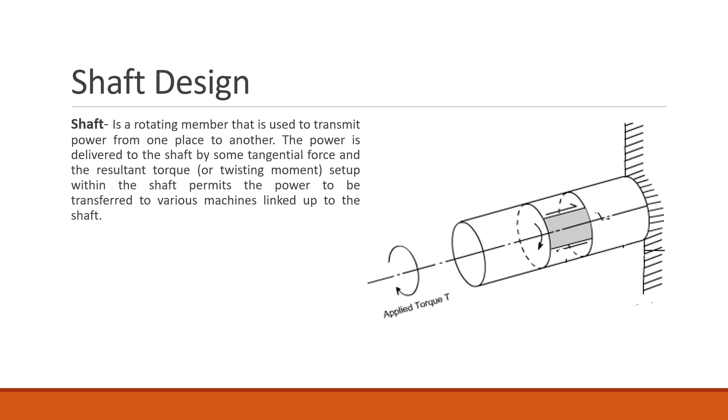Types or general classes of shafts. First is the transmission shaft, which transmits power between the source and the absorbing power. Next is the machine shaft, a shaft which is an integral part of the machine itself. Next is the line shaft or main shaft, which is the one driven by a prime mover.

Next is the drive shaft, a shaft which transmits power from a motor or engine to the rest of a machine. Next is the counter shaft, jack shaft, or head shaft. These are shafts intermediate between a line shaft and a driven machine.

Spindles are short shafts on machines that impart motion either to a cutting tool or to a workpiece. Axle is a non-rotating bar which does not transmit any torque but is only used to support rotating machine elements like gears, pulleys, and wheels rotating on it. Last is the stub shaft, an integral part of the prime mover.

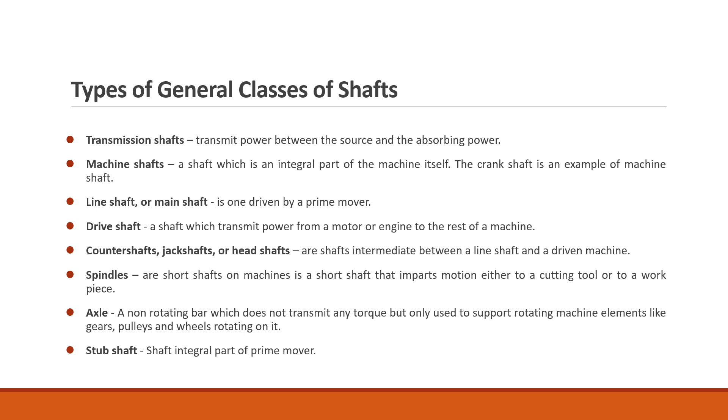Shaft formulas. First is the torque of the shaft. Torque is equal to force times the radius, or force times diameter over 2.

Next is the pure torsional stress for the shaft. Torsional stress is equal to T over Zp, and it is equal to T multiplied by C over J, where T is the torque, C is the center, and J is the polar moment of inertia.

For solid shafts, torsional stress is equal to 16T over pi d cubed, and for the hollow shaft, torsional stress is equal to 16T dO over pi multiplied by the outside diameter raised to 4 minus inside diameter raised to 4. If the polar moment of inertia is not given, the formulas are...

Pi multiplied by the diameter raised to 4 over 32, for the circle. And for the square, width times height raised to 3 over 6.

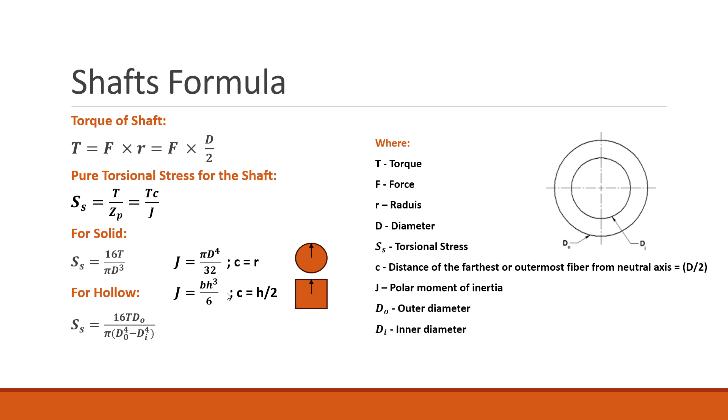Pure flexural stress. It is the bending stress, tensile or compressive, due to the forces acting upon machine elements like gears, pulleys, etc.

Flexural stress is equal to M over ZR. M is the bending or flexural moment, and ZR is the rectangular section modulus.

And it is also equal to 32M over pi d cubed. For hollow shaft, it is equal to 32 M dO over pi multiplied by the outside diameter raised to 4 minus inside diameter raised to 4.

If the rectangular section modulus is not given, the formulas are pi d raised to 4 over 64 for circle, and width times height raised to 3 over 12 for square.

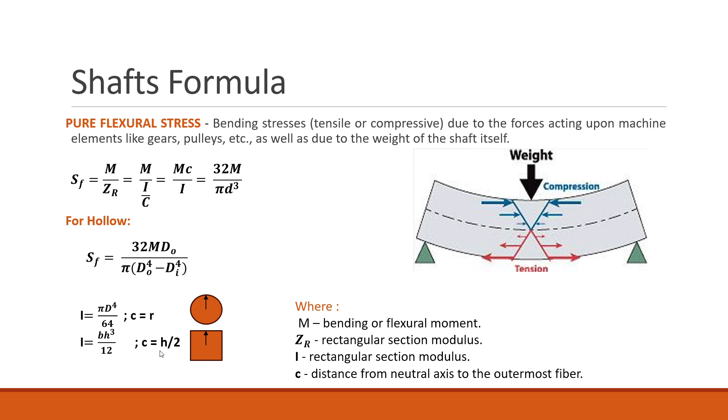Combined torsion and bending stress. For maximum shearing stress, it is equal to 16T over pi d cubed, multiplied by the square root of the combined shock and endurance factor for bending times M raised to 2, plus the combined shock and endurance factor for torsion times torque raised to 2.

And for the maximum axial stress, it is equal to 16T over pi d cubed, times the quantity of the combined shock and endurance factor for bending multiplied by M, plus the square root of the combined shock and endurance factor for bending multiplied by M raised to 2, plus the combined shock and endurance factor for torsion times torque raised to 2.

And for the combined normal stress, it is equal to axial stress, positive or negative, plus flexural stress.

And for the combined normal and shear or torsional stress, the maximum shearing stress is equal to one half times the square root of normal stress, positive or negative, plus 4 multiplied by shearing stress squared.

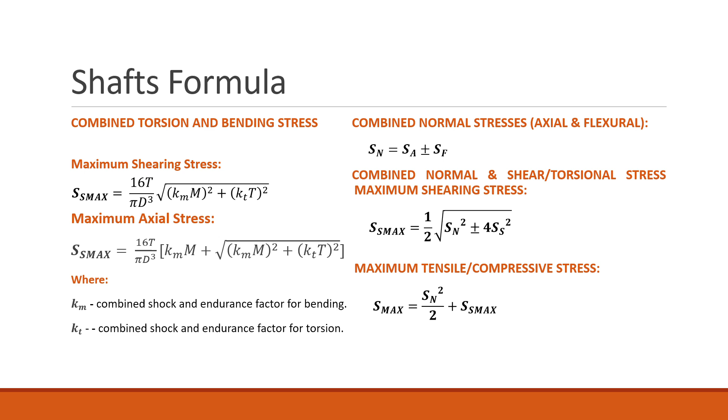Power transmitted of shafts. P is equal to 2 pi T N, in terms of kilowatts or HP. For SI units, P is equal to torque multiplied by the speed over 9,549,000. For English units, P is equal to T multiplied by N over 63,025.

Angular deformation or angle of twist. It is equal to TL over JG, where T is the torque, L is the length of the shaft, J is the polar moment of inertia, and G is the modulus of rigidity.

Stress relationship. Yield strength at shearing torsion is equal to 0.5 of yield strength at tension, compression, or bearing stress.

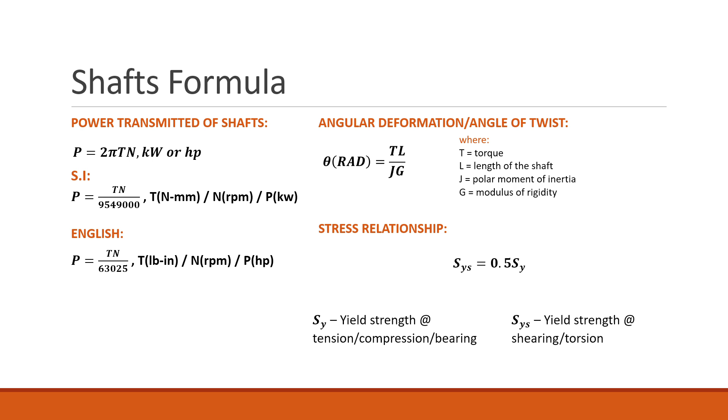Empirical formula for power. For main power transmitting shaft, it is equal to d cubed multiplied by the speed over 80, cubic inch per HP minute.

For the line shaft carrying pulleys, P is equal to d cubed multiplied by the speed over 53.5, cubic inch per HP minute.

For smaller short shafts and counter shaft, P is equal to d cubed multiplied by the speed over 38 cubic inch per HP minute.

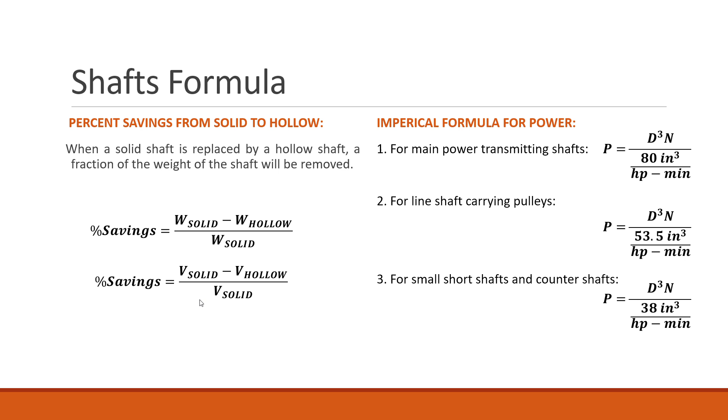Percent savings from solid to hollow. When a solid shaft is replaced by a hollow shaft, a fraction of the weight of the shaft will be removed. Thus, percent savings is equal to weight of the solid minus weight of the hollow over weight of the solid, and volume of the solid minus volume of the hollow over volume of the solid.

Let's proceed to the sample problem. A shaft is used to transmit 200 kilowatts at 300 RPM by means of a 200 mm diameter sprocket. Determine the force tangent of this sprocket.

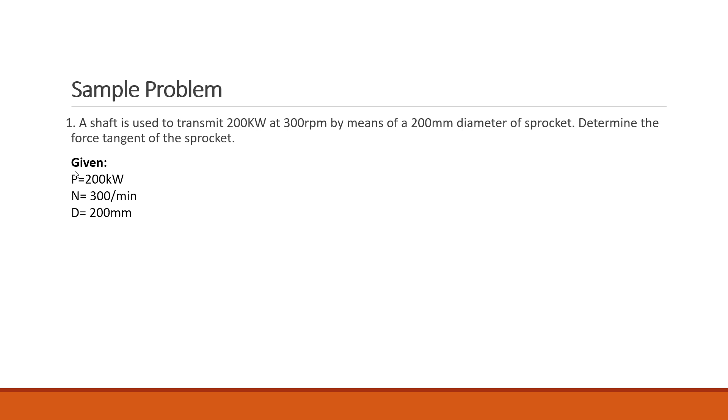The given is first the power, which is 200 kilowatts. Next is the speed, 300 per minute, and the diameter is 200 millimeters.

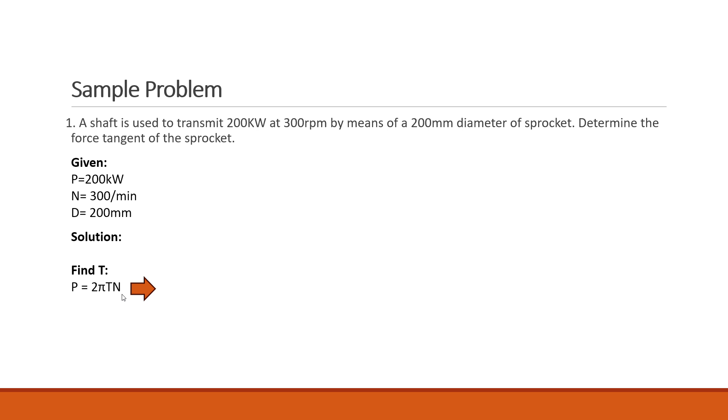For the solution, first let's find the torque. We can find the torque using the power formula, since we have given power and given speed, and pi is of course a constant value. So this is the formula: T is equal to P over 2 pi n.

Substitute the values: 200 kilonewton meter per second over 2 pi times 300 over 60 seconds. We converted it into seconds so the seconds cancel out. And the answer is 6.3662 kilonewton meter.

Next, let's find the force. This is what is asked of us. Torque is equal to force times d over 2. We have the torque and we have the value of the diameter. So the formula becomes force is equal to torque over radius, or d over 2.

So this is the value: 6.3662 kilonewton meter over 200 millimeters times 1 meter over 1,000 millimeters, since we need to convert it so the meters cancel, over 2. Then the answer is 63.662 kilonewton. This is the final answer for number 1.

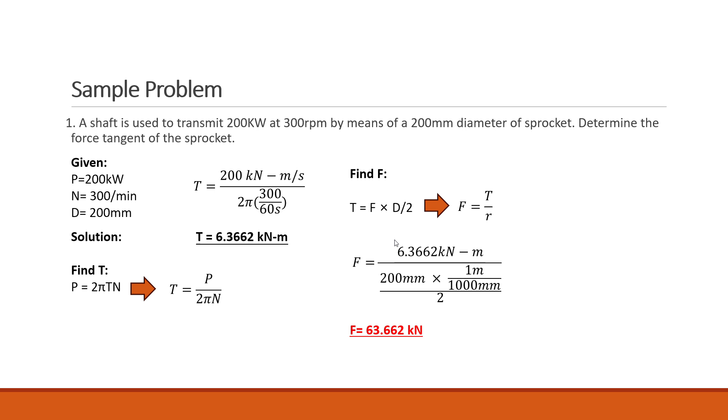Let's proceed to sample problem number 2. Find the diameter of a steel shaft which will be used to operate a 110 kilowatt motor rotating at 5 RPS if the torsional stress is 90 megapascal.

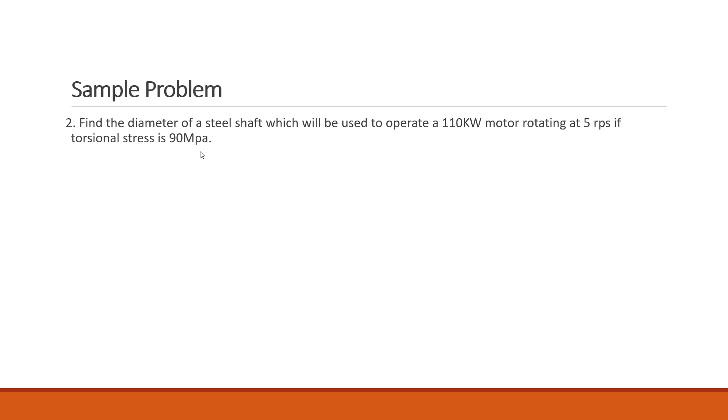The given are, first, the power, which is 110 kilowatts. Next is the speed, which is 5 per second, and the torsional stress, which is equal to 90 megapascal.

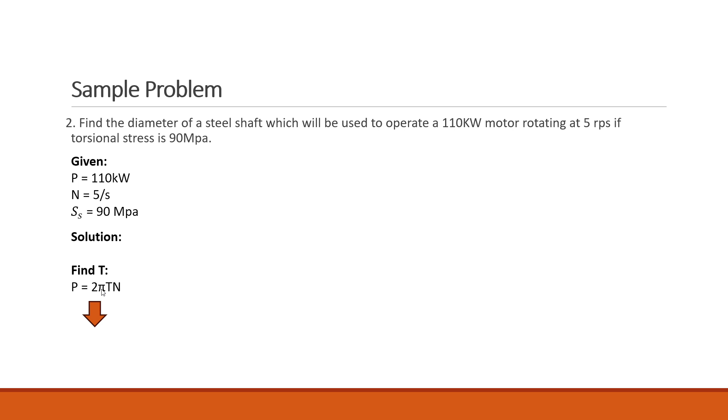First let's find again the torque. Same process as in number 1: find the torque using the power formula. Then substitute the values, and the answer is 3.5014 kilonewton meter. Then next, find the diameter.

To find the diameter, we can use this formula since we have the given torsional stress. We can use 16T over pi d cubed.

It will be equal to, let's substitute the values first: 16 multiplied by 3.5014 kilonewton meter over pi multiplied by 90,000 kilonewton over meter squared. We made it into kilonewton meter squared, so it became 90,000.

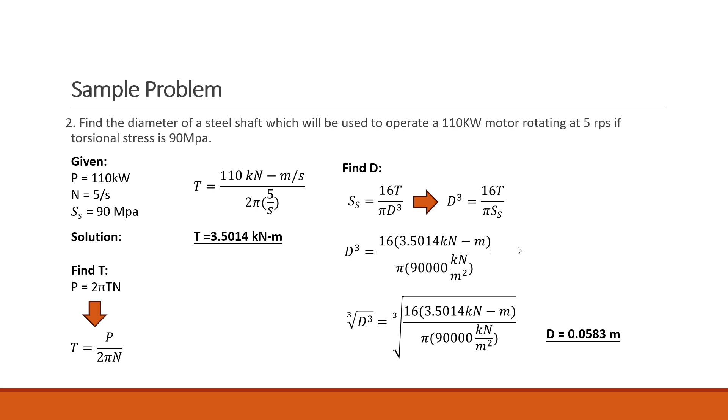Let's proceed to the next. A shaft has an ultimate stress of 350 megapascal and has a factor of safety of 5. The torque developed by this shaft is 3 kilonewton meter and the outside diameter is 80 millimeters. Find the inside diameter of the shaft.

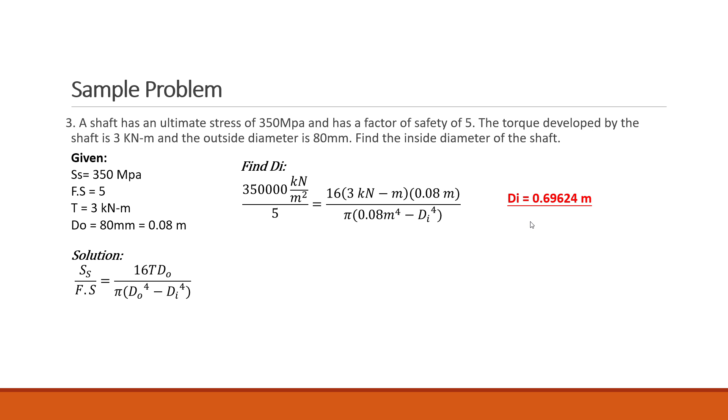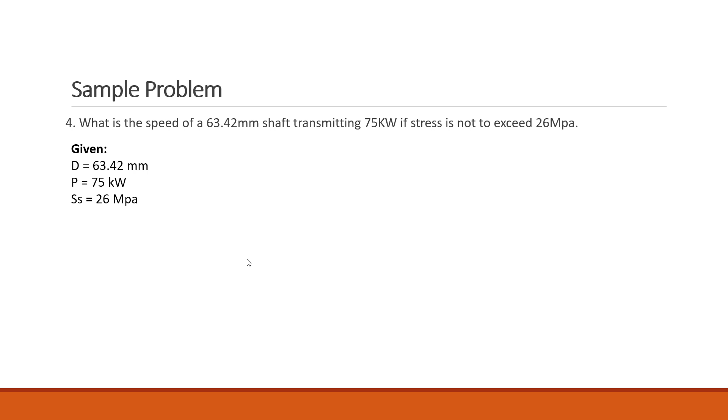Next problem: what is the speed of a 63.42 mm shaft transmitting 75 kilowatts if the stress is not to exceed 26 megapascal? Here is the given solution.

Torsional stress is equal to 16T over pi d cubed. Since what we need to find first here is the torque, so it becomes equal to this. The answer becomes 1.3022 kilonewton meter. That is the torque.

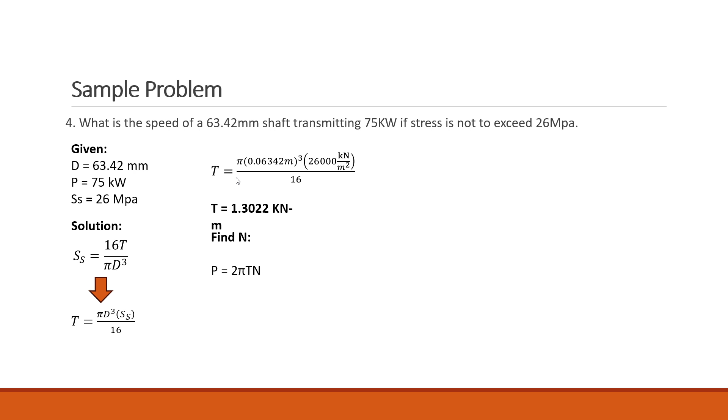Then let's find the speed, which is what's being asked in problem number 4. Using the power formula, N is equal to P over 2 pi T. And this is when we replace the values, and the answer becomes 549.99 RPM.

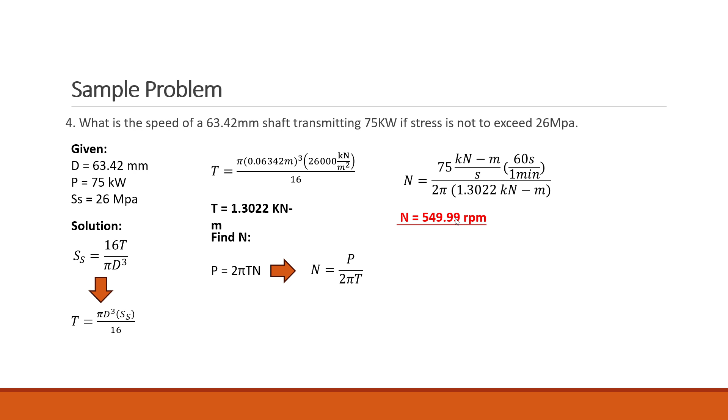Next, this seems to be the last problem. A steel shaft transmits 50 horsepower at 1,400 RPM. If the allowable stress is 500 psi, find the diameter.

Here are the given values: P is equal to 50 horsepower, speed is equal to 1,400 RPM, and the allowable stress is equal to 500 psi.

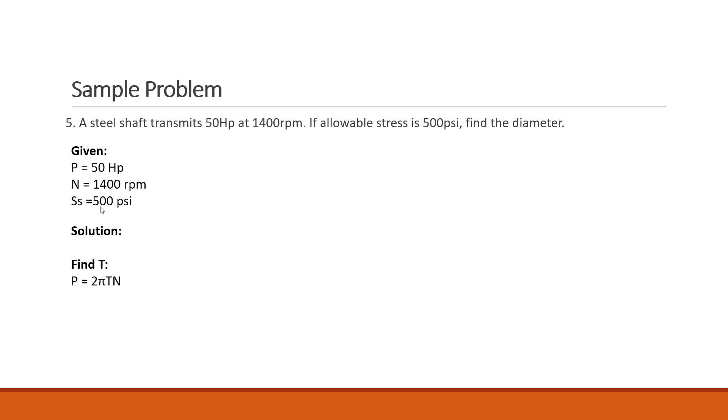First let's find the torque again. The formula becomes torque is equal to power over 2 pi n. When we substitute the values, the answer becomes 187.575 foot-pounds. So let's convert the feet into inches. The answer becomes 2,250.906 inch-pounds.

So now we can find the diameter using the shearing stress, or torsional stress, formula: 16T over pi d cubed. So the formula becomes d cubed is equal to 16T over pi multiplied by the stress, similar to what we solved in an earlier problem set. We take the cube root of that, and then the answer is 2.8409 inches. That's all for today.